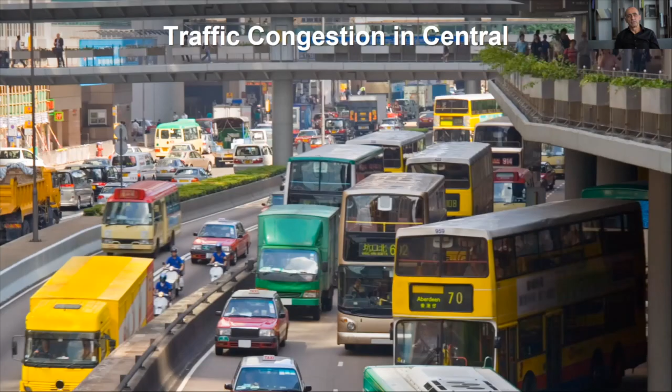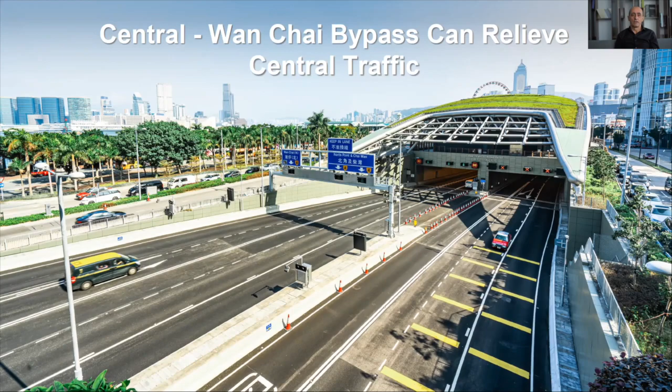We all know the nature of the traffic congestion in Central and the roads around it. The Central-Wan Chai Bypass has alleviated a lot of that congestion, but we're still experiencing quite a lot on the roads in Central. ERP may help, and there's a study going on right now, but I'd suggest many of the vehicles in Central are well able to afford ERP and wouldn't be deterred by it. On top of that, there's a huge amount of car parking in Central that those cars are trying to access.

Most commuters in Central use the much vaunted Central Footbridge system, which is absolutely wonderful and a shining example to the rest of the world of how to connect up cities. Here's a map of that footbridge system. It encompasses the mid-levels escalators, the walkways around Hong Kong Land's property, the extension of those walkways into IFC, and then on into the Admiralty walkway system, and even the North Wanchai walkway system, and of course the mid-levels escalator.

From west of the mid-levels escalator, there is no longer a walkway system. Those walkway systems also link up to a subterranean system. In dark blue, you'll see the MTR subterranean connectivity, which is particularly important for Central Station because it links all the way over to AIA building, Chater Garden, and all the way through to IFC — a very important linkage indeed.

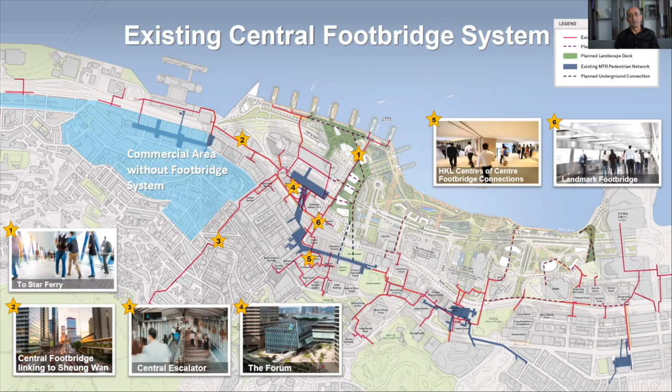There are missing links — and these aren't the monkeys that came along — these are the missing links in Central and in Admiralty. Dotted in small dots are links that will be built imminently, such as Site 3 in Central. In the larger dots with arrows are links not anticipated to be built, but which we should be looking at. What these links do is take three significant footbridge systems and connect them together: the Central footbridge system, connected to the Admiralty footbridge system, and from the Admiralty footbridge system to the Wan Chai North Wan Chai system.

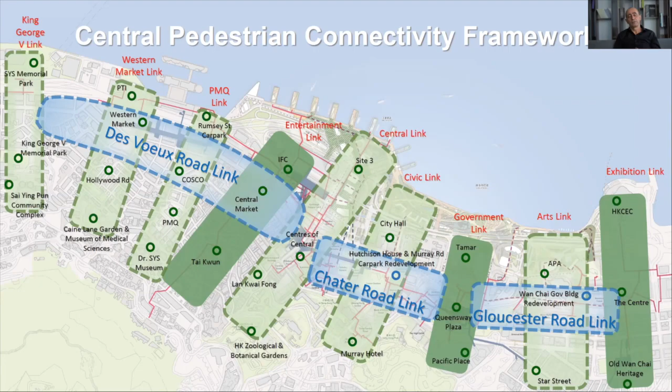And these are the weak links. These are the ones that are really not succeeding in linking up the villages, if you like, that we need to have a good close look at how we can stitch this whole network together. So that's it, a brief introduction to the footbridge system, underground system of Central, and the village network.

Thanks, Keith. I think that's a great way of painting, setting out the frame of the picture that we're trying to fill in today. So I thank you for that context. Alok, you want to come in on this one?

Yeah, there is a lot that can be done, of course, as Keith said. Keith has shown very clearly there are missing linkages which can be developed as we redevelop parts of Central and also redesign some of the space there. But there are a number of measures that can be done immediately that can improve Central quite significantly.

For example, one is goods vehicle transport. As you know, in the morning peak, currently about 20% of the traffic passing through Central is actually goods vehicles. These vehicles can easily be moved out of the peak hour system of Central, and that could alleviate traffic to a large extent.

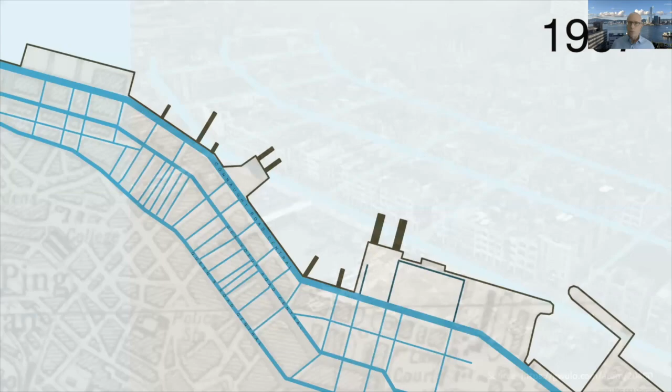You had a reasonably tight grid of east-west roads and north-south roads, which were of course compromised. We know Hong Kong sidewalks today, and back then it was probably even worse in terms of activities hindering easy pedestrian movement, but the connections were there, and it was all on the ground - there were no elevated roads at the time. This is where we find ourselves at the end of the 1950s, with this relatively tight grid of street-level pedestrian network. And this is what we have today.

The schizophrenia I'm talking about is the fact that across Connaught Road, in all the new areas built since the 1960s - starting with Shun Tak Centre, developments also around Tamar and so on - what we have is this. Now Keith rightly celebrated this network as leading globally in terms of the connectivity it offers, but it's very different, and that's the point I'm trying to make.

So we kind of grafted a system that's a combination of elevated and underground walkways, connected podiums, to a very traditional system of movement. And we all suffer, well, at least those of us who live and work in this area, every time we try to transition between the two. And I would argue that what we have is a constrained but free zone, which is the old Central.

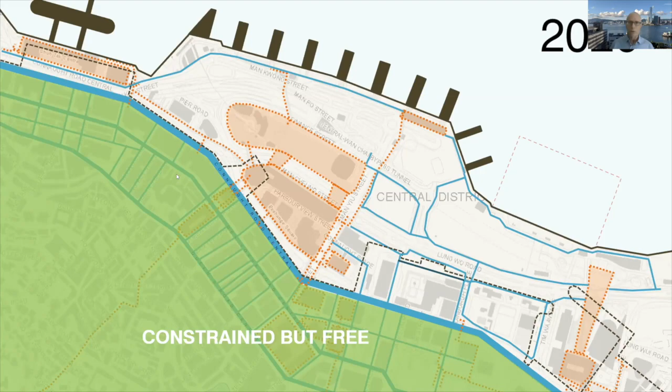Constrained, by that I mean narrow sidewalks, congested roads, and a lot of traffic, as Alok was saying. But on the other side, we have a limited and prescribed system, and it's important to understand the difference. It's prescribed in the sense that you can only walk where you are supposed to walk. There are not too many ways of connecting two dots. And I'm not saying it's necessarily bad, we all get used to it, but it's very, very different.

And of course, the transition between the two happens across what I call the moat, which is Connaught Road. Connaught Road really is the moat that divides Old Hong Kong and New Hong Kong, including all the connections you have across a moat typically, which is bridges and maybe tunnels and so on.

So I'll indulge myself in a quick exercise of what if. Oh sorry, before I get to the what if, how do you cross the moat again? We have all those bridges, but importantly, and this is the point Alok was making, we have the transportation nodes, the ferries, the PTIs, and the Hong Kong Station MTR, which are all ways that bring people directly into the heart of the moat, heart of the New Hong Kong, and from where they can circulate or connect to this new system of circulation.

By the way, it's a pattern we see all over Hong Kong, but in Central it's adjacent to the old pattern, so in that sense it's a bit different. But these are the only ways to really penetrate this new area.

So I did a quick exercise of what if, an alternative history of Central that maybe would have given us something like this. Imagine the reclamation was planned as a piece of a city as opposed to big parcels to be built in increments by developers. Of course, that fantasy does not exist.

But the thing this would have given us is the kind of views you get, for example, down Pottinger Street. So imagine instead we might have gotten this, right? Wouldn't it be nice if we had even sight lines and visual connections to the waterfront through a grid that continued? And again, this is the way it was until the 1960s. There were always those sight lines and views towards the waterfront.

So anyway, the fantasy is just a fantasy, but I'll close by asking, is there a way that street level connectivity cannot be completely ignored in the development of Site 3 and other future developments around the central area? A particular case in point is these two passages maintained under Site 3, the two roads.

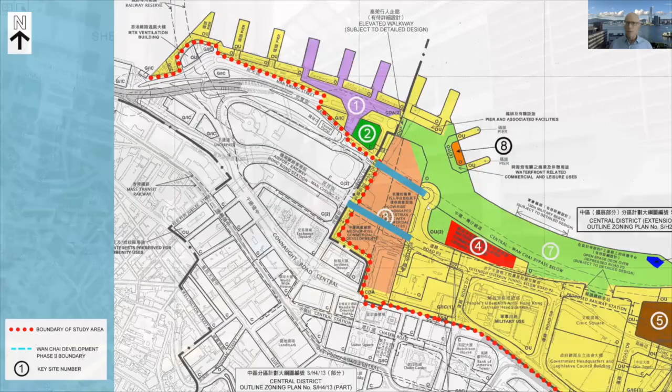If you look at one of them, it's a direct connection of the road that cuts across IFC. Now this one arguably just barely works as a street level connection. There's a bit of a sidewalk, at least on the north side, but the bridge is kind of light, so you can say it works at street level.

My concern is that the passage under Site 3 will look more like this, which is of course the connection, the road connection under the convention center, because it's very, very wide. And so you'll have, opposite the Apple Store, something that looks maybe something like this.

And I guarantee you that will push everybody to the podium level, where again, it's a viable and attractive proposition. But as I said earlier, it's prescribed and limited.

The one thing I hope does remain doable is maybe doing something to cross the moat in a more street level fashion, maintaining sight lines between the City Hall complex and, let's say, the Mandarin Oriental, which again both have very nice street level footprints. So with that, thank you for your attention, and let's continue the conversation.

All right, great, this is fantastic. I think we have a setup here for the discussion. Let me just try to see how I can manipulate my screen here.

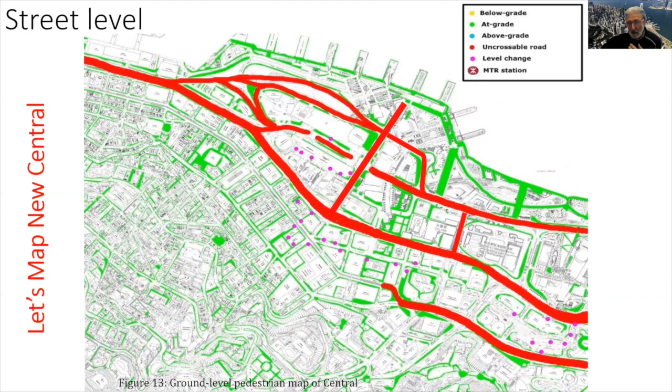We've been introduced, so Keith, you mentioned the underground is extensive, especially in Central, and this gets to the point made by you, Oren, where the street level environment is very much the green one, south of the moat, while on the north side we have these massive roads, where we then have to live quite elevated.

And there is this idea for Des Voeux Road Central, whether we could improve walkability there and make that an east-west connection with much greater enhancements for pedestrians to move at the street level. So those are some of the ideas that are there.

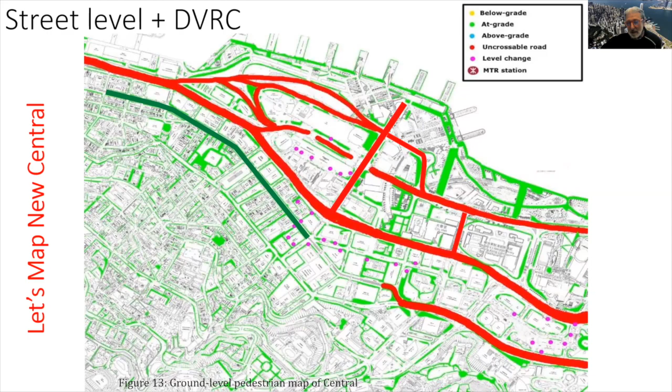Then we have this ERP, which Alok, you mentioned, and that kind of overlaps both areas - the constrained area and the free area with massive through roads, and the areas where everybody is already walking at road level. This puts to me the question for all of you: whether ERP should really cover the north, or whether ERP should just be for the area where we currently are at street level - whether that is the area where we should push the cars out, but not necessarily in the north, because we need that vehicle throughput, we've got the car parking, we need people to get in and out.

So the delineation of where we do ERP, where we ask people to walk at street level, and where we have lots of traffic and transport coming through - that adds a second question for you, Alok. Can I move the bus north, and can we move the loading and unloading north of the moat, and then get the people across to the south of the moat, out of those vehicles, and the goods out of those vehicles? Is there a way of doing that?

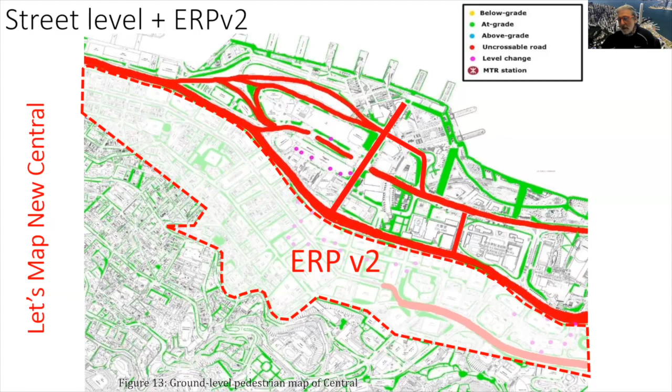So not only, as you mentioned, reducing or changing the time that goods are loaded and unloaded, but during the day people can get their goods across the moat - what infrastructure are we going to need for that? And then you can start thinking about the ERP stretching out south of the moat to left and right. That's a question on ERP.

And then the elevated system and that network - I've exaggerated here, and I think Keith does a much better color variation, more specific than the students did on my side. But anyway, the emphasis is clear: north of the moat there is a lot that is elevated. Is that elevated network, all that blue, like a concourse in an MTR station where you find your way down to the right train?

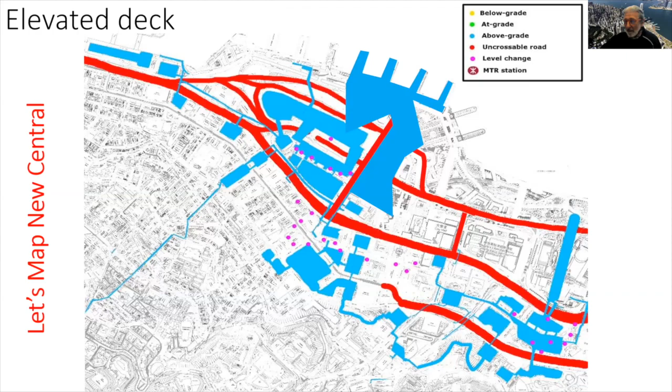Is this where you can go down to the right ferry, the right minibus, the right bus, the right train, and so on? Whether that concourse level is where you can connect between all these different modes of transport, and this concourse level, with all its shops, entertainment and restaurants, is where I can easily be directed to all these different modes of transport. That's a question I pose to all three of you.

And then can that concourse work better, and what other functions should that concourse have? And then again, I just put back the ERP argument.

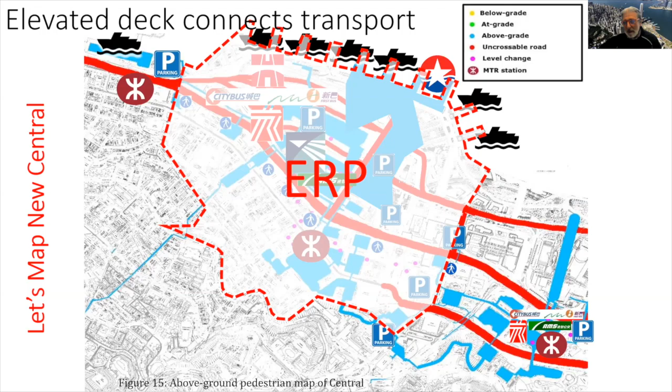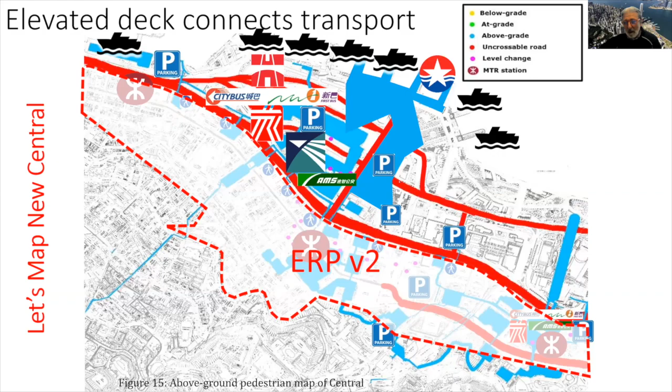If I put the ERP on it, and get the cars out of the south of the moat, and have everybody park - including the ladies in high heels - at the north of the road in a big parking structure, can I get them over the moat to do their shopping and walk about and enjoy the south of the moat, but leaving the car north of the moat? So it's not just getting in and out of public transport, it's also getting in and out of their car parks. If that would be a line of thinking we should develop in terms of the functionality of that elevated network, the concourse.

And then if you start to think about the concourse - and this is illustrative, not exact - these are the points where you can get up to the elevated network or down from it. Should they be increased a lot? We really think about where you can go up, where you can go down, and also where can you cross from south to north. That's basically how we think about the elevated network and what it does for Central, to make that new Central work better.

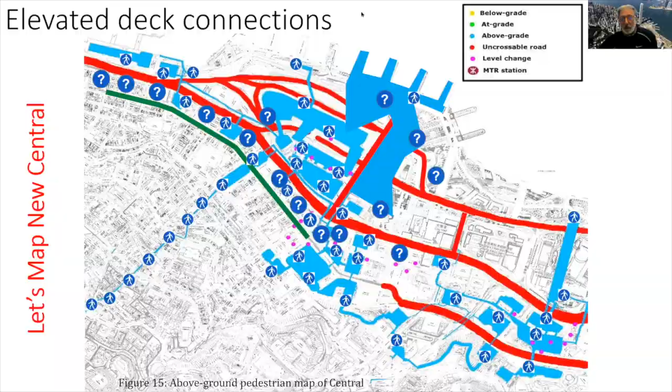What are the improvements we should be making to that elevated network and the footbridge system that we have? So those are the questions I'll throw to you. Keith, you started us off today, and you've now heard points made by the other three of us. How do you respond to this in terms of the function of that concourse? Can we put up the central map again?

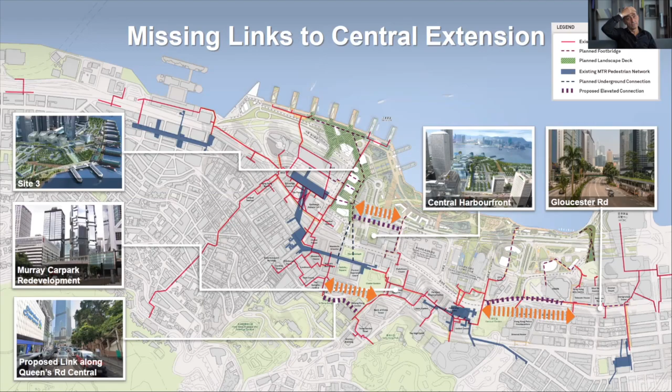However, I don't think it's difficult at all to build more connections, possibly even travelator connections, from key node points north of Connaught Road, across by bridge and into the heart of Central - encouraging people through a mix of ERP and direct intervention so that vehicles couldn't be on certain streets, maybe closed down from 9 till 6. People would drop off north of Connaught Road and perambulate through to the traditional core of the city. I completely agree that's possible and would be wonderful to achieve. All right, so it looks like we need a real plan to support that.

But can we quickly go to Alok on moving the buses to the north of Connaught Road. If we can deliver that much improved connection with the south of Connaught Road, as Keith and Oren have alluded to, do you think it's going to be possible? You're the bus man, can we do it? Those are 77 bus routes.

So Paul, it is already happening. If you see how many bus routes are actually on the north shore of that island compared to the south, I think it's already happened. Most of the buses are there because, if you remember the picture from Oren, the big PTIs are actually on the north of the moat. So that is kind of happening organically, but yes, it can be planned in a better way.

Coming to your concourse idea, I think it is indeed a great thing, the blue patch connecting north and south, but it's a very poorly designed concourse. The wayfinding from a pedestrian perspective, I think there's a lot that can be done in the form of softer initiatives like wayfinding. It's not just about creating space, it's about letting people guide through that space from one end to the other.

Today, if you're in one of those blocks trying to find your way through Alexandra House and Landmark and over to the North Shore, it is literally, you lose orientation. There is absolutely no idea. The signages are inconsistent, they don't follow a single standard, and it's just very confusing. So I think those investments need to be done in coordination with the property developers or whosoever is responsible for that signage, to make sure those spaces are really functional and usable by pedestrians.